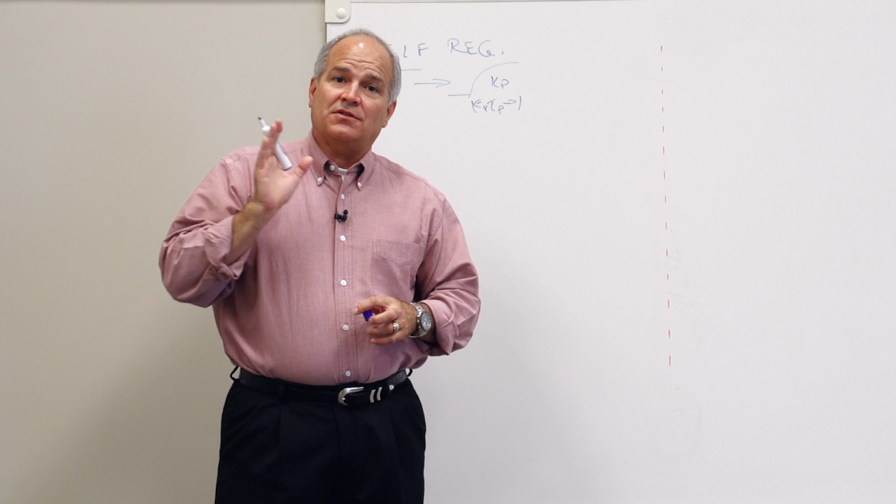There are two types of processes we've talked about before. There's what we refer to as self-regulating. Those are the kinds where you make a change and you get a process with a nice smooth response. From other videos we've done, we talk about the process gain and the time constant that define how much it goes and how long it goes. Those are self-regulating. Things like flows, pressures, temperatures, consistencies, those types of things.

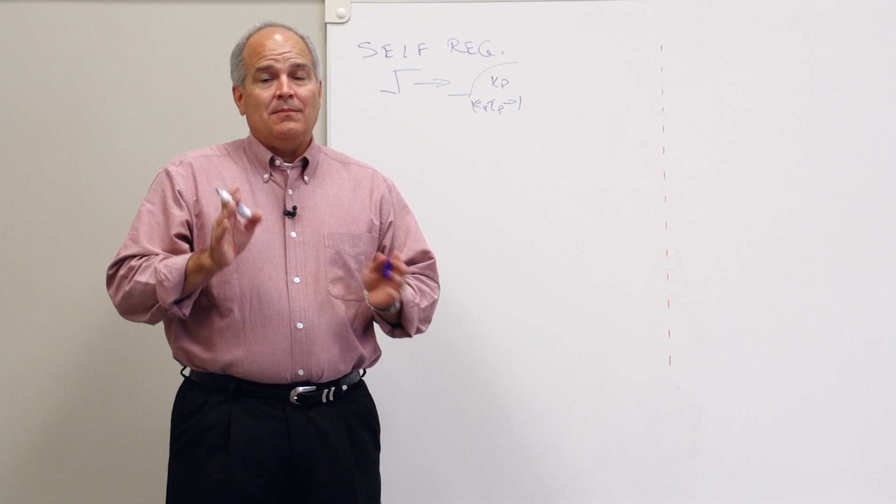That's not all your processes though. That's about 80 to 90%, which is why a lot of guys are good at that. But then we move into the non-self-regulating, or what we're going to refer to as a tank.

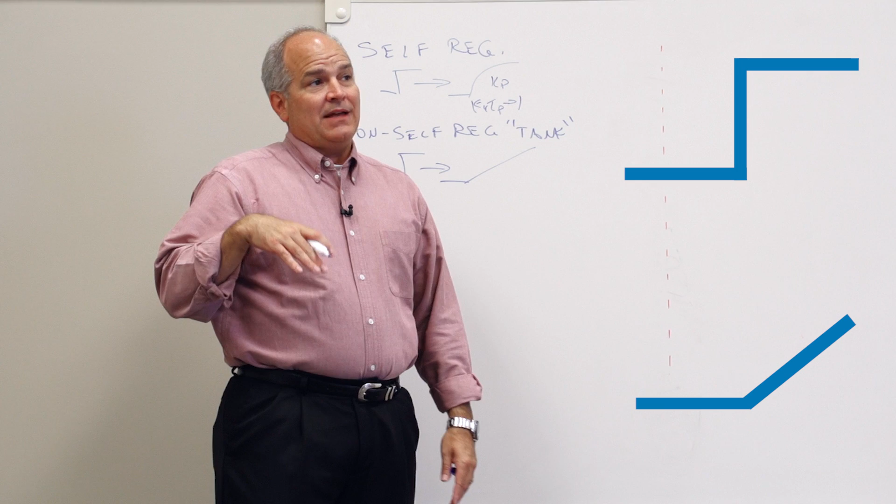In this case, whenever I inject an imbalance, off it goes. That's why they're a little bit scary. If you're doing a manual bump test, you have to pay attention. That's why we really recommend that you do a visual inspection—you walk around, you get an understanding of your process before you start doing a bump test.

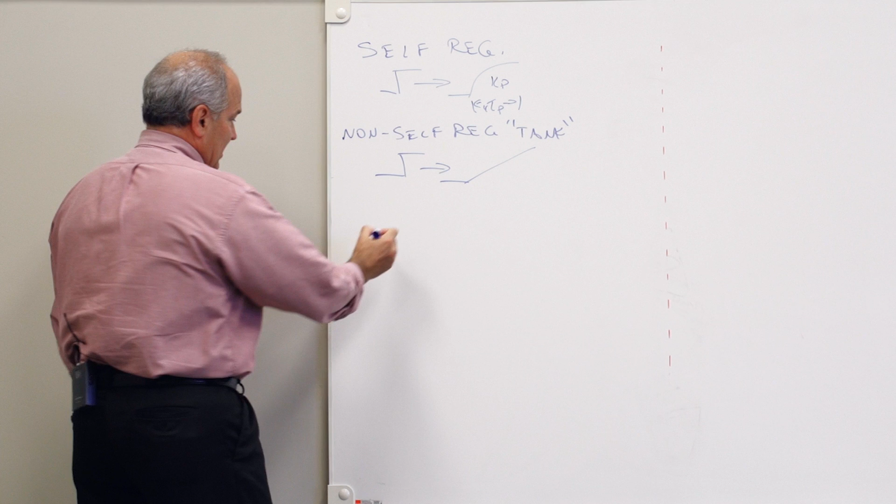So what we're going to do is talk about how do we identify the process, how do we come up with a model, and how do we come up with tuning rules to identify and make sure that this loop is properly tuned. Now for our process, I'll just draw a little picture here of a tank.

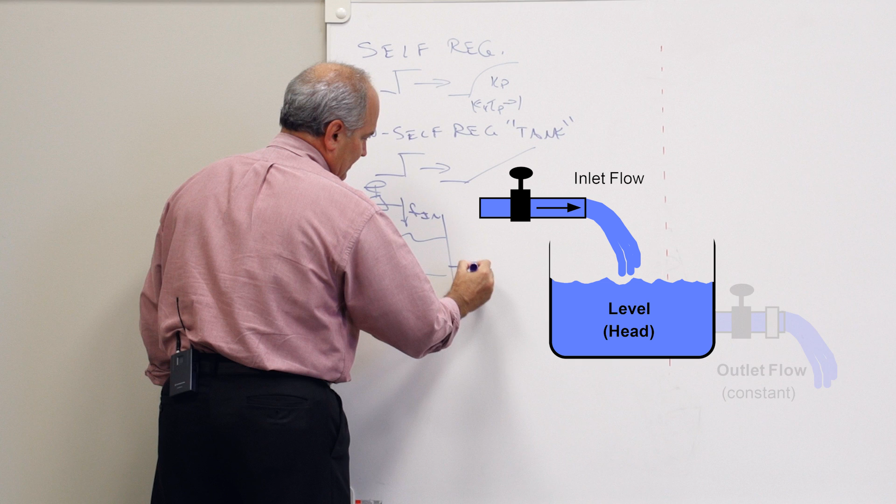It has an inlet flow, and here we've got an outlet flow. In this case, what we have is a controller that's usually fixed. So this is our flow out, and our flow in. This is a fixed outlet flow—maybe it's a drive, maybe it's a control, but it's a constant demand. In other words, what we've done is broken the link between the head pressure and the flow.

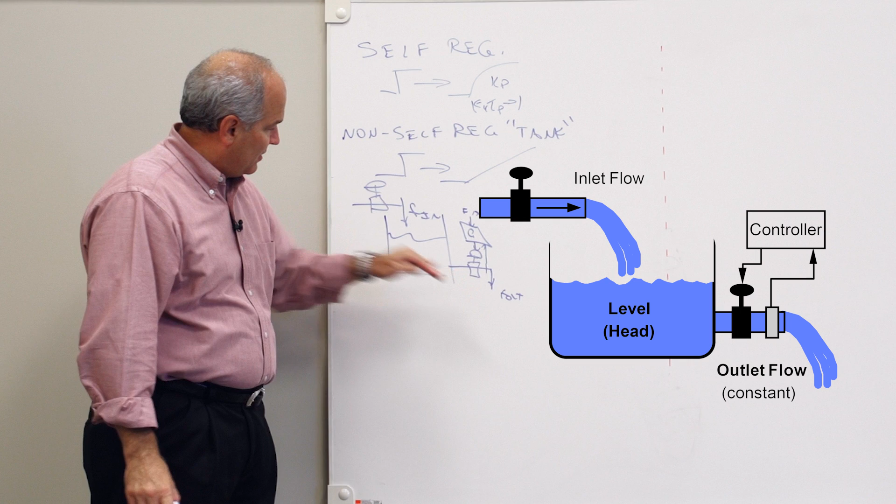So in this case, if we have a bump test, let's say our flow in equals our flow out. In this space, we would say this is balanced. And this would be our level. So when the flow in and flow out are the same, the level doesn't move.

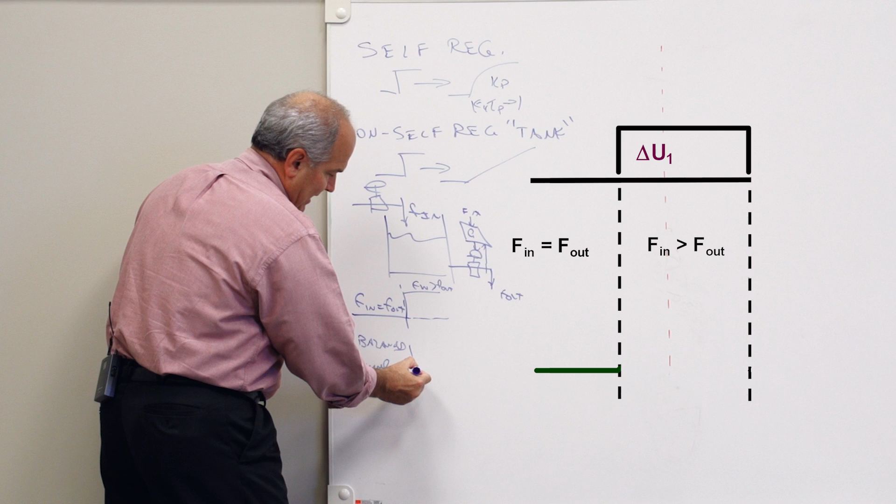Now what happens if I increase the inlet flow, so the flow in is greater than the flow out? Well, what's going to happen is your tank is going to start moving. Now let's say at this point we drop the inlet flow back, so once again the flow in is equal to the flow out—we're back into a balanced mode.

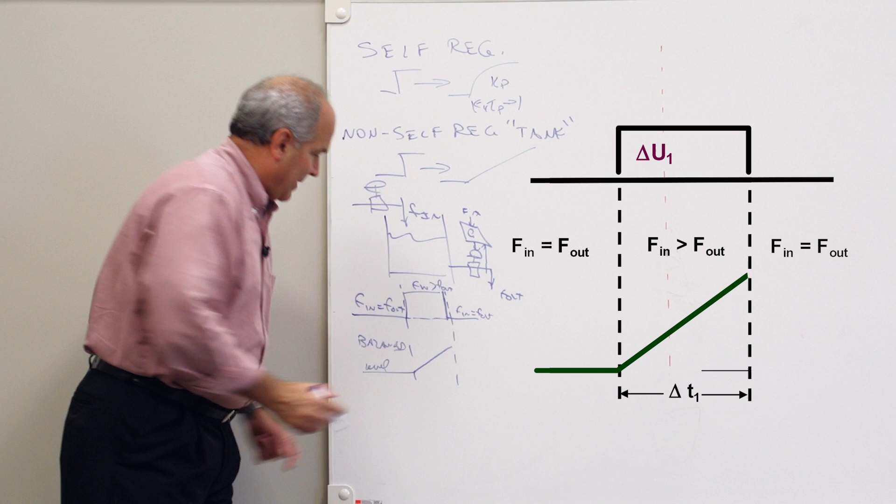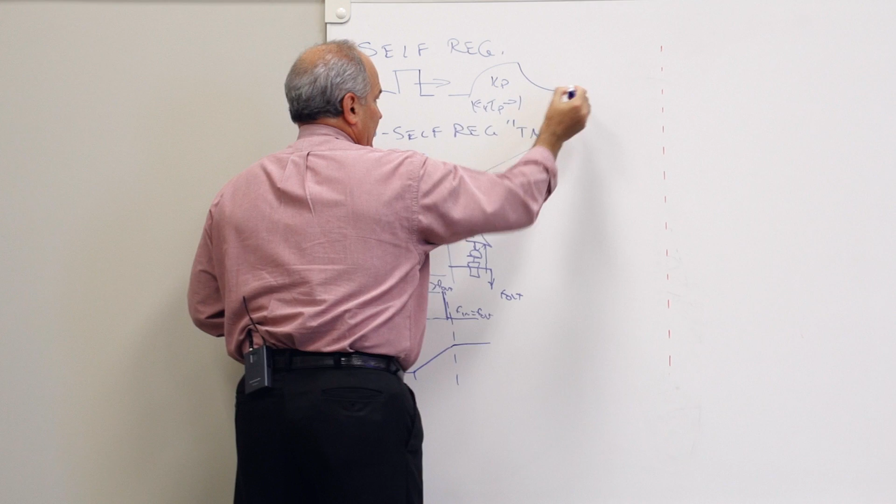What's going to happen to the tank level? It's going to stop. This is one of the ways I like to determine if I even have a self-regulating process. On a self-regulating process, if I put the actuator back to where it was, the process will come back down. If I draw the rest of this, it'll usually come back to where it started if we don't have stiction and hysteresis.

But in a tank, if you put it back into the balanced condition, your measurement will move based upon how long it was separated. This is why we call this an integral type of process—you can see it's integrating this difference or this imbalance. That's why these are tricky.

So what's the process model? How are you going to come up with model parameters? You can't use the process gain and time constant because it never stops, it never settles. So our definition of process gain as it applies to self-regulating would virtually be infinite here. So we have to have a different model.

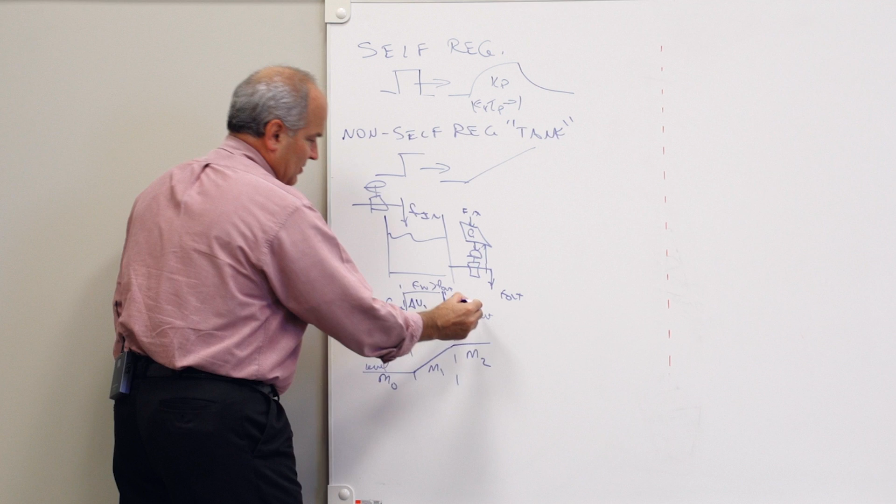What we do here is recognize that there are different slopes—let's call them M0, M1, and M2. And let's call this change in output 1 and change in output 2. In this case, what we're finding is that the process gain for a tank is equal to the change in slope over the change in the output. So the slope, how did this change versus that—that would be this process gain.

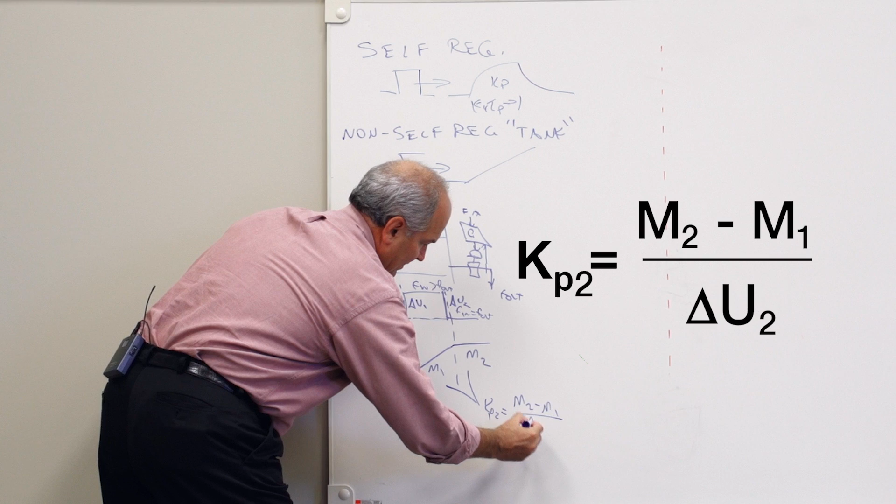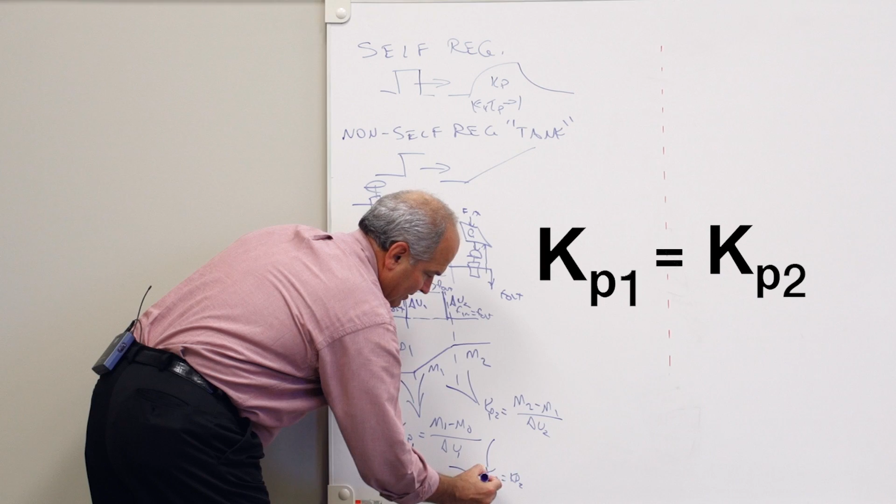Let's call that KP1. And then maybe we do it again for this one and say that KP2 is equal to M2 minus M1 over our output 2. I like to do these two process gains because I can also identify if KP1 equals KP2—then I have what I would call a linear tank.

Tanks can come in all shapes and sizes. You've seen them that look like a cylinder. Sometimes they're on the side so that they have a cross section that changes with the level. Sometimes they look like a cone. We're going to get into that in our nonlinearity section in a later segment, but right now we're assuming that we have linearity in our process gain.

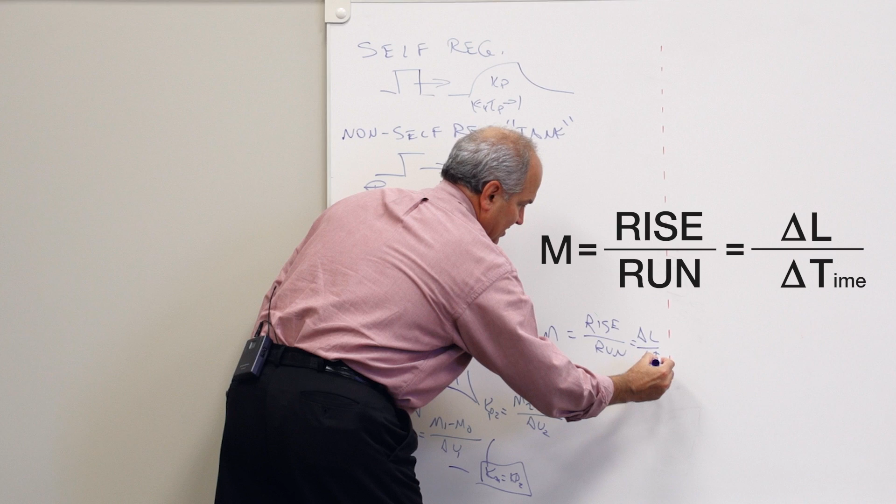But what I want to identify here is the slope change. If you remember, slope is equal to rise over run, which would basically be the change in level over the change in time. Now this is where, that's the slope.

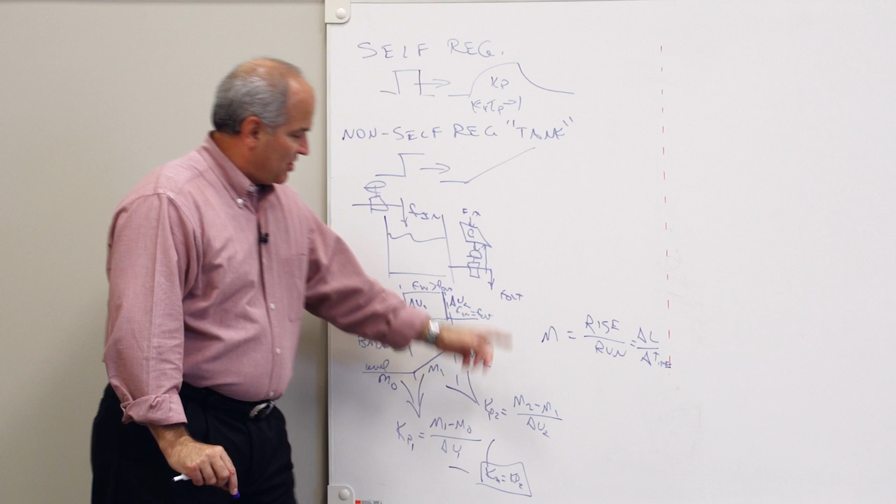This is where, when we do this in classes and in settings, it's kind of hard to do, especially if you have noise on your signal. It's kind of hard to identify. So I recommend that you do this a couple of times, but there's a few things I want to point out here: it's the change in slope, not the slope. I've seen this messed up.

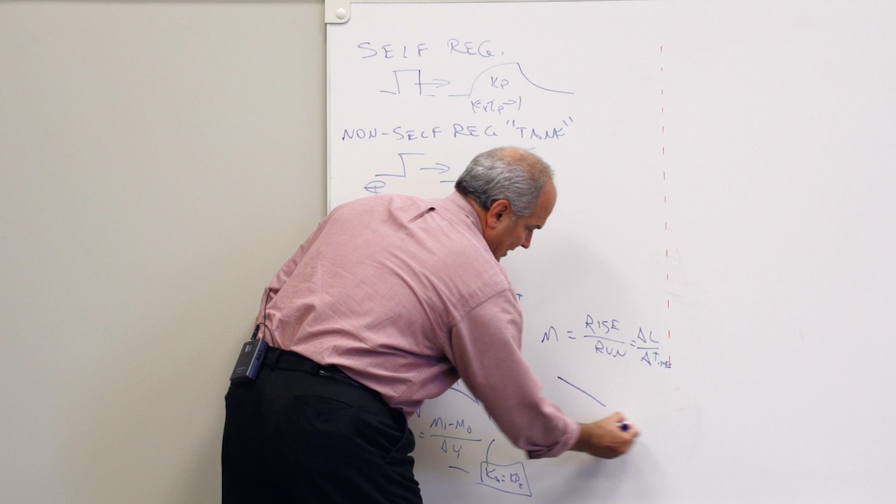For example, let's say that when I walk up to my tank, it's doing this, and then I do my bump test. Let's just say this is M0, this is M1, and this is my change in output 1. I can't just say the slope is equal to that divided by that — it won't give you the right answer. You have to get the change in slope divided by the output that produced it.

Now a couple things to remember here: your level. Most of the tank levels are normalized 0 to 100, but there are a few that are in feet or meters, so you then have to normalize that. I'd recommend that you look at your industrial books, your technical notes, to determine if the gain needs to be normalized or if they have a factor to do that already.

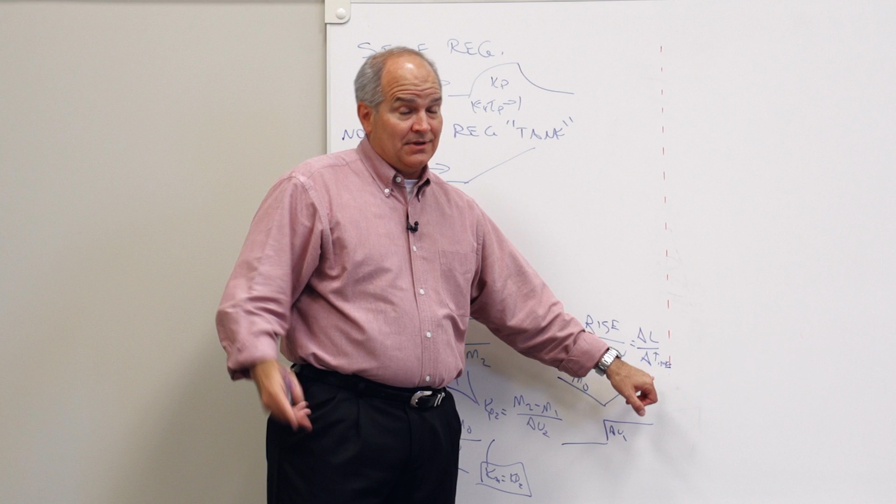But the time also has units — it can be seconds, minutes, or hours. What I would recommend — well, it's not just a recommendation — you need to set the time units on your slope equal to the integral time of your controller. So if your controller is working in minutes, you need to do your slope in minutes. If it's in seconds, it needs to work in seconds.

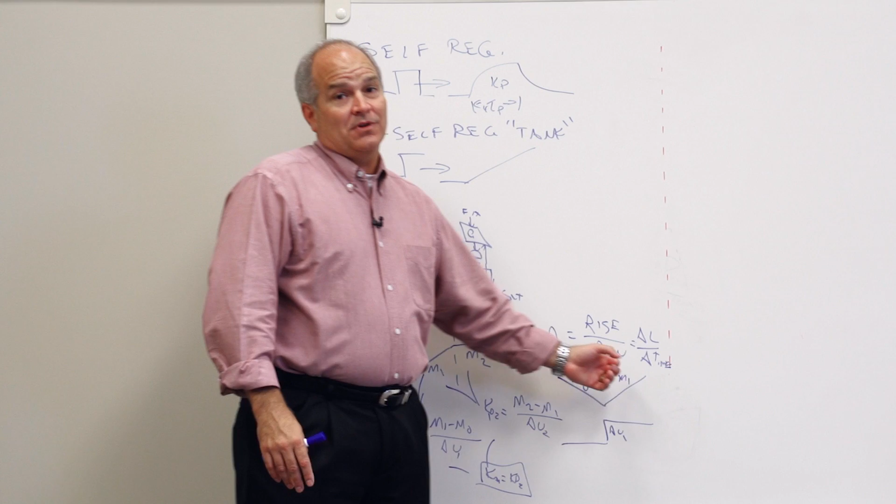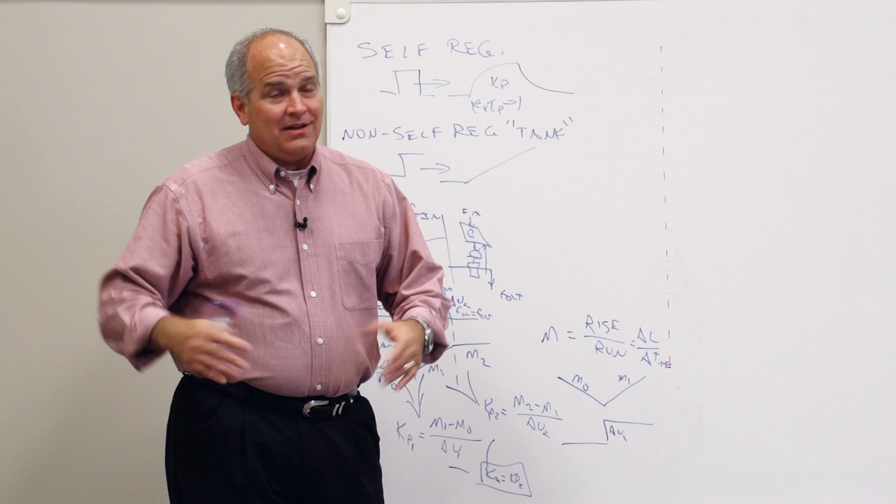I was teaching a class once and a guy came flying in to say, you told us wrong. He had calculated all this, but he'd messed up on his minutes and seconds, so he was off by a factor of 60 on his tuning and the thing went crazy. So this theory doesn't work — no, that's something I want you to understand: the theory always works, but your implementation of it might be an issue.

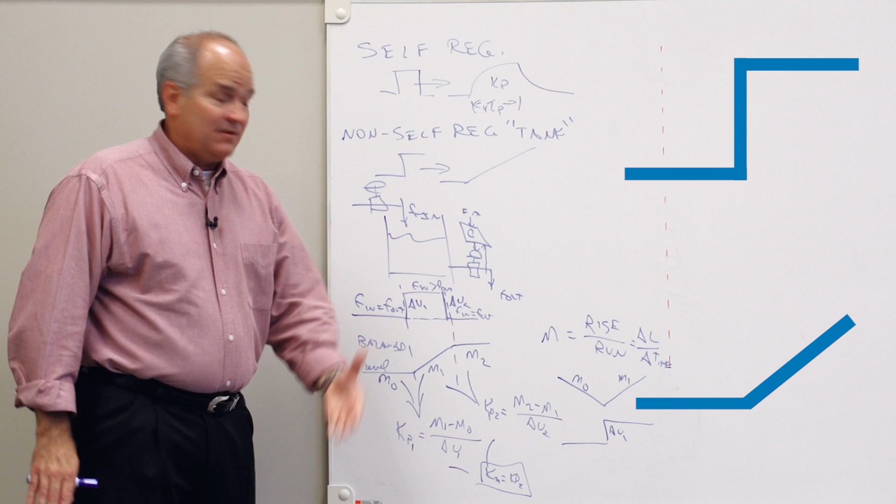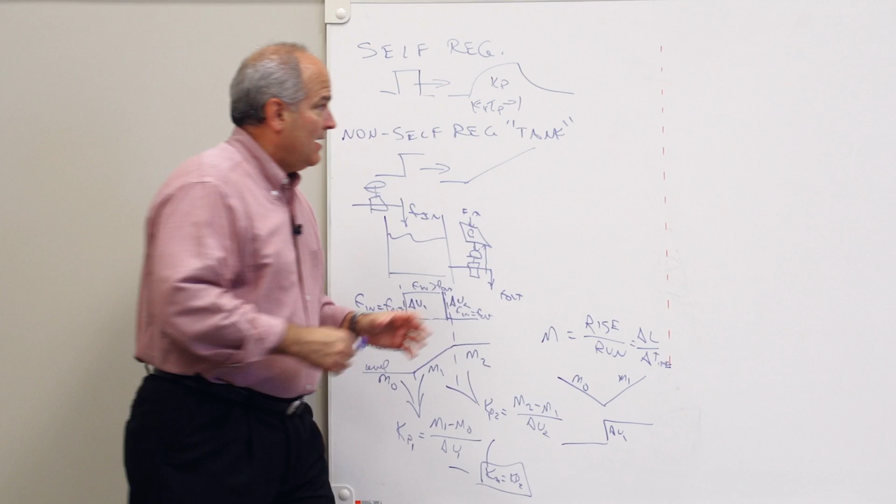So what we have here is we're identifying our process. We recognize that a large percentage of our industrial sites are self-regulating. Now we're talking about tank level tuning, or non-self-regulating, where we have an imbalance — we have an integration effect. So we have a new term, balance, but we have to calculate the process gain. I always recommend that you link the process gain back to the physical characteristics of the tank. What's interesting here is the process gain — let me just start here with, let's draw a picture.

Let's say this is my level, 0, and let's say this is 100%. So this is my measured value, and this is time, okay? And let's say this is another one here — let's say this is my flow in. So here we've got, this is time, 0 to 100.

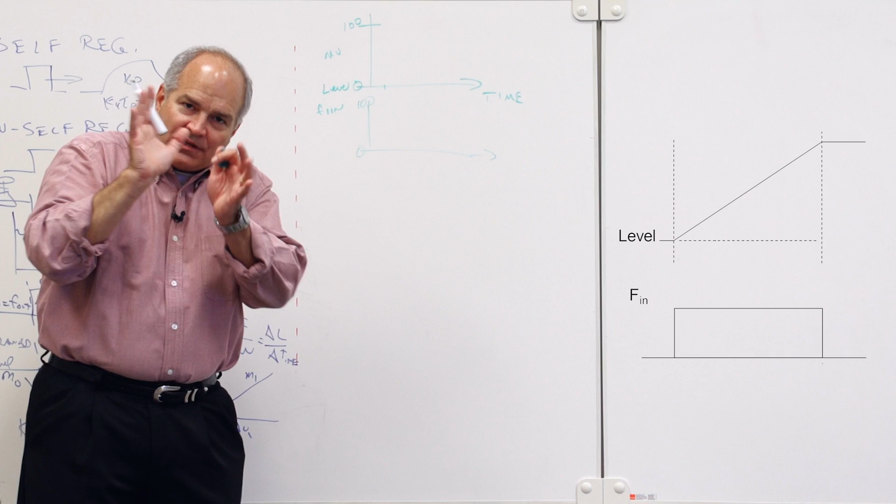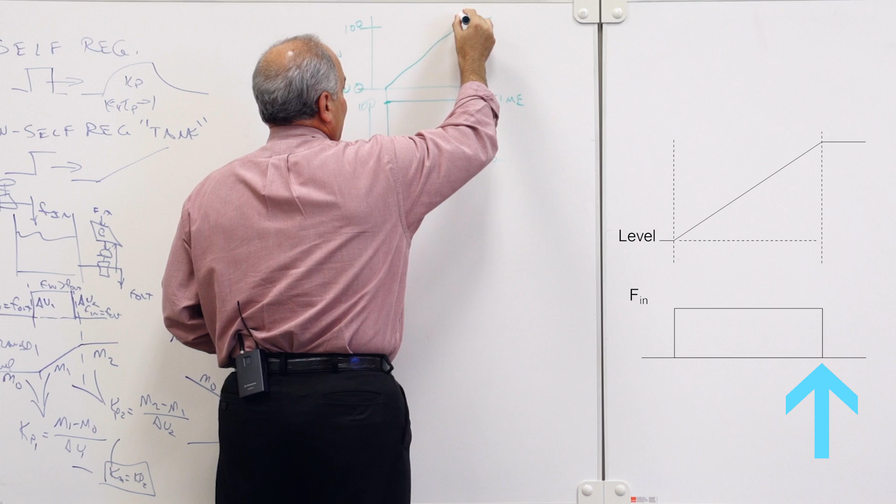So what we're trying to do here, to help you understand what this process gain is calculating, is: if my flow is 0, I have nothing going into the tank. Now what we do is we take our flow to 100%, so we have 100% of our flow being pumped into our tank. It was empty to start with, and we've shut the outlet valve off, so we have an imbalance of 100% — it's the biggest we can get. So what's going to happen to this level? Let's say we time it so that we drop this back to 0. So what we're doing is we are filling the tank.

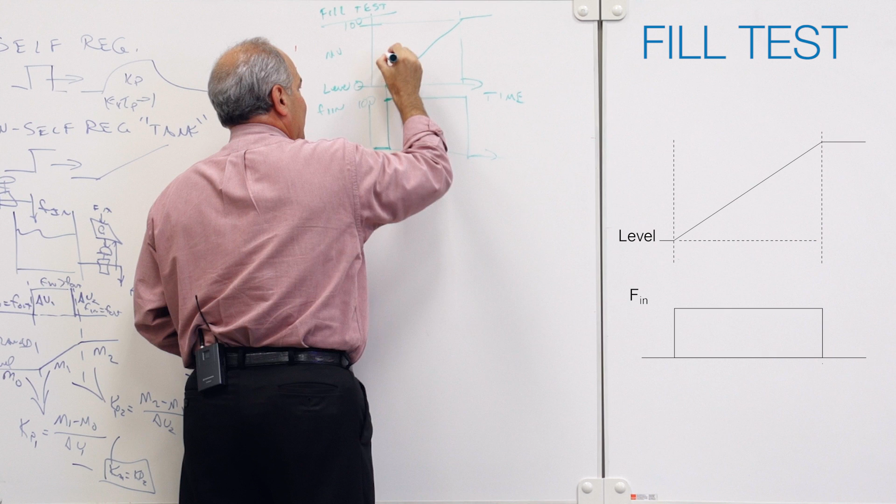So we have filled the tank. Let's call this a fill test. This time from here to here is what we call the fill time, the tank fill time. Now I don't recommend that you go and do this, saying, 'Mr. Operator, could you shut all your tanks off so I can fill them up and time it?' If you could, great, but you can't do that. So what we're trying to say is the fill time is really what we're looking at.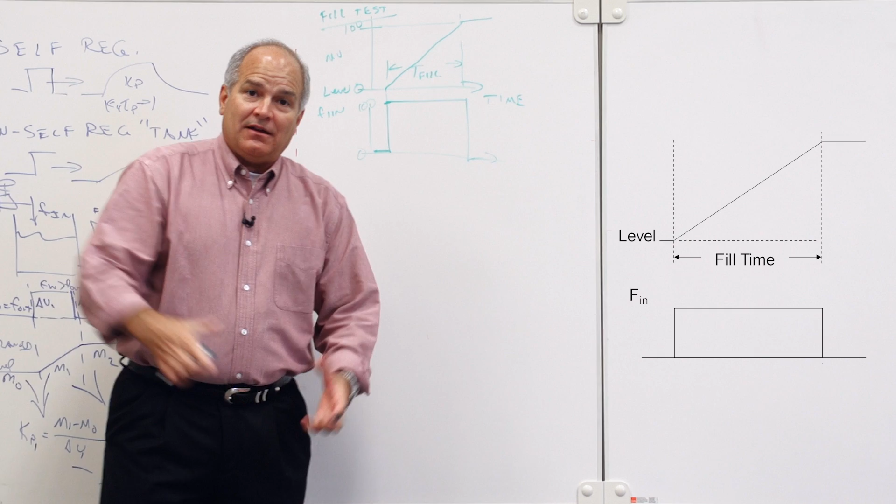Imagine a garden hose that you're filling a bucket with. It's going to take a while, but now let's say you got this gigantic hose. How long does it take to fill that bucket? It's a function of the amount of volume of fluid going into it.

So the way I like to think of the process gain is it tells me the relationship between my input device and my tank size. If I have a tank as big as this room and I've got a little garden hose, this is going to take forever to fill up. But if I have a tank that's the size of a glass, it'll fill up really quick. So that's why one guy used to say the amount of time it takes to walk around a tank is real close to the fill time.

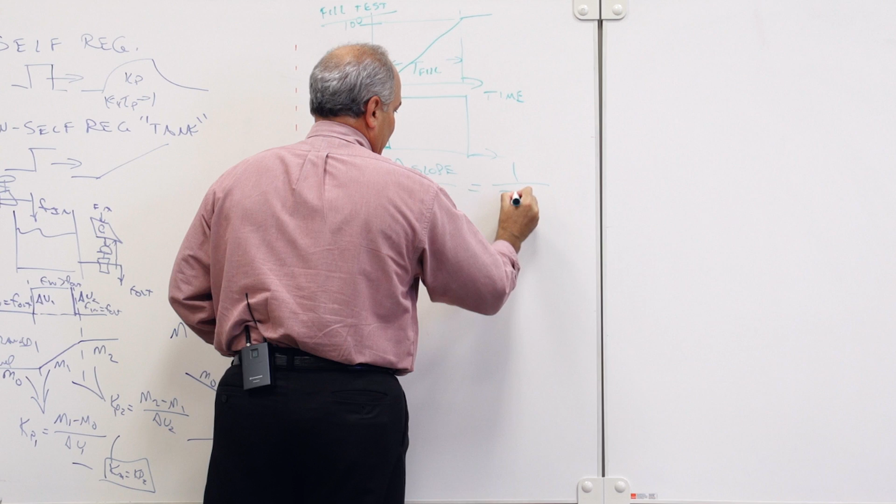Now again, I don't necessarily recommend that you go walk around your tank, but this concept that the fill time is what we're after - it turns out that the process gain, which is the change in slope over the change in the output, is equal to 1 over the fill time. So the process gain and the fill time are related, they're inverse of each other. Which is where we started thinking, maybe we don't even need to do a bump test.

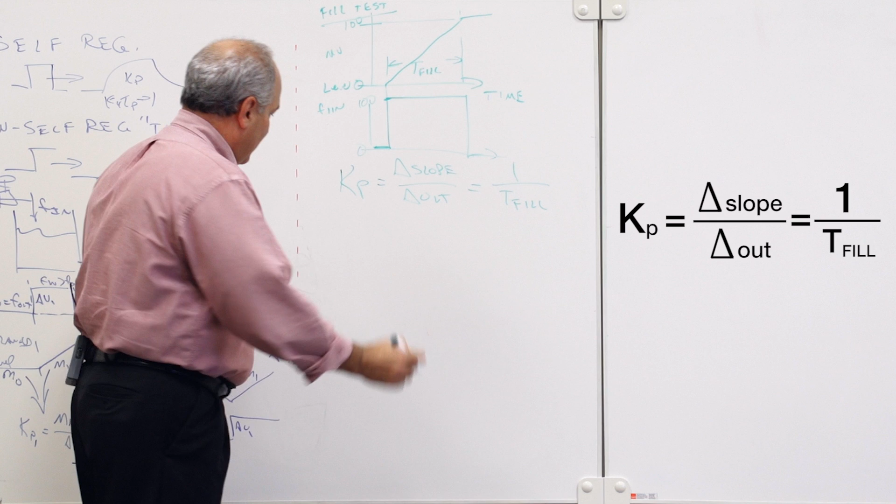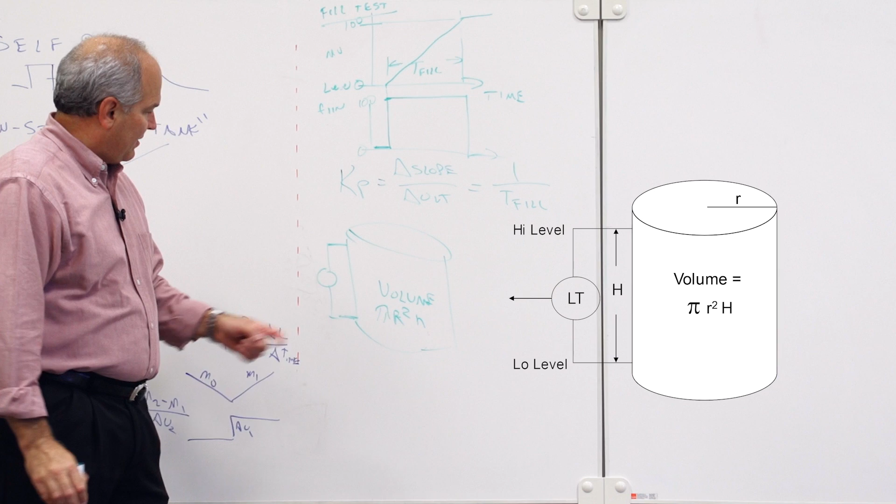What if we have our tank here, if I know the volume, which is pi r squared times the height. And here's my level transmitter, and you got your taps. So the height's the distance between the taps. And then we have our inlet flow, and we know that, and we can identify the maximum flow.

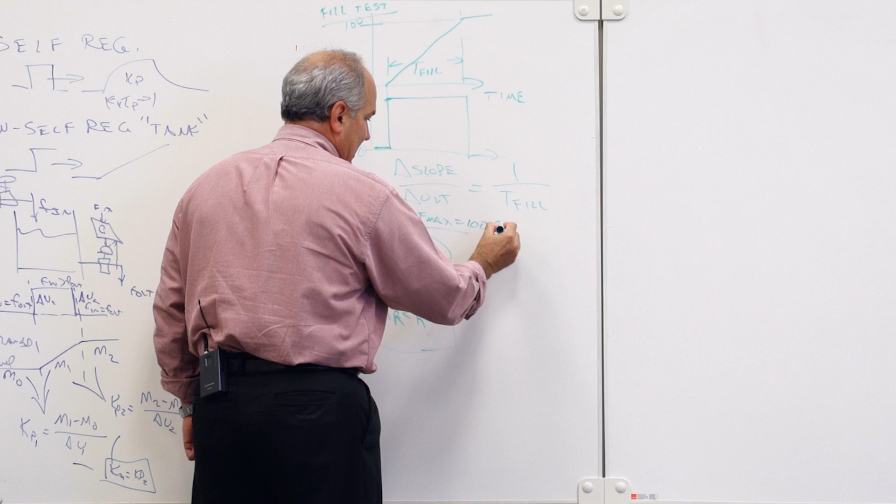So if I know the maximum flow and the volume of the tank, I can calculate how long it takes to fill that. For example, if this max flow is equal to 100 gallons per minute, and let's say this volume is equal to 1,000 gallons, how many minutes is it going to take to fill it? 10 minutes. So this would have a process gain of 0.1.

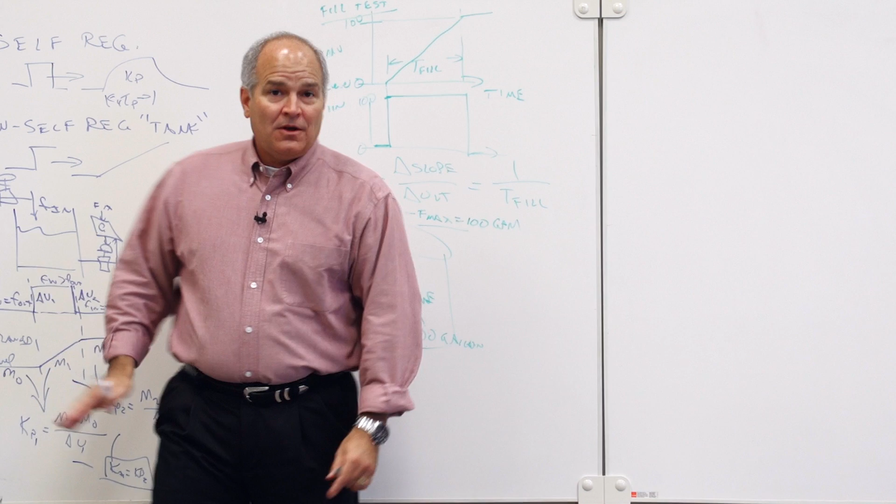So that's how we do this. I always recommend that after you calculate your process gain, whether you use the slope technique or the volume technique to calculate the fill time, go and take a look at the tank and see if that makes sense. I've run into a lot of cases where they messed up the fill time, or messed up the max. They looked at the span on the transmitter and had it calibrated wrong.

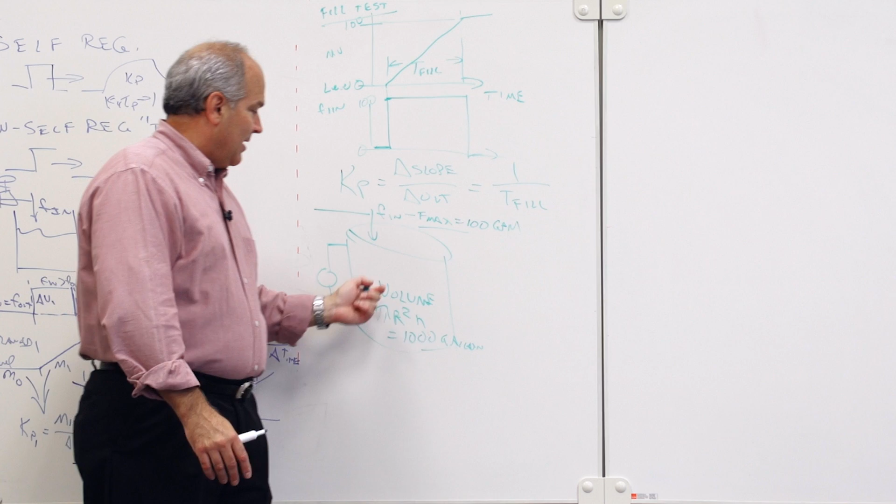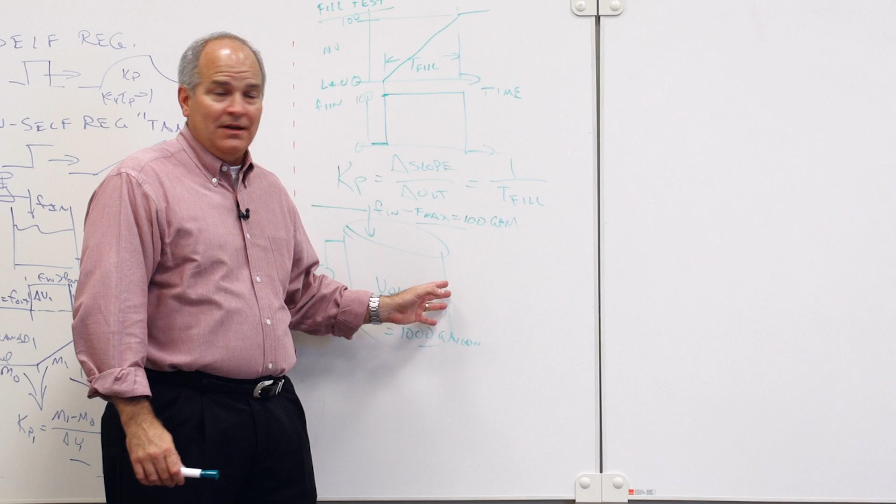A lot of times this volume, you can go look at the tank, look at the diameter, and calculate it. But on a lot of industrial P&ID drawings, they'll have the volume stamped right there on the drawing. So I've come up with my process gain, and then I apply that directly into my tuning, and it's incredible how fast you can tune a loop. So if you don't have this information, then you have to do a bump test. If you have this information, I find this to be way more accurate, because the fill time is what you're after.

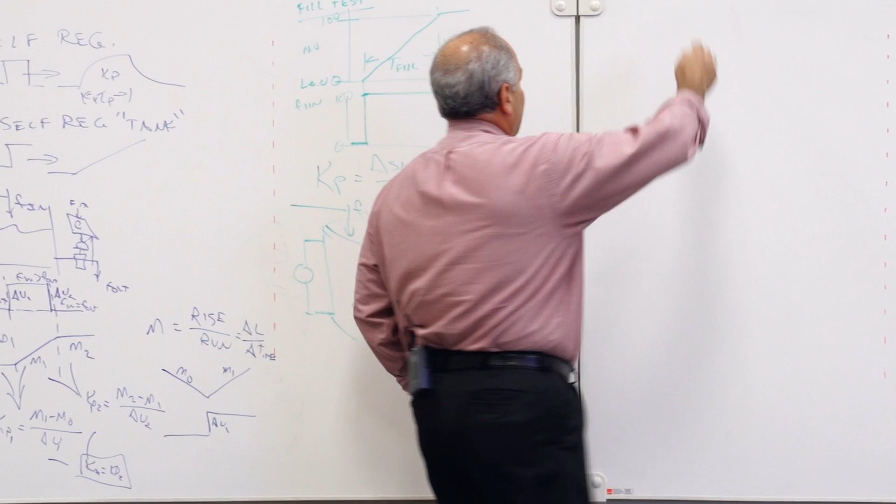Okay, now that we have the process gain, what we're interested in is coming up with the tuning. So now that we've identified the process, now we need to come up with tuning.

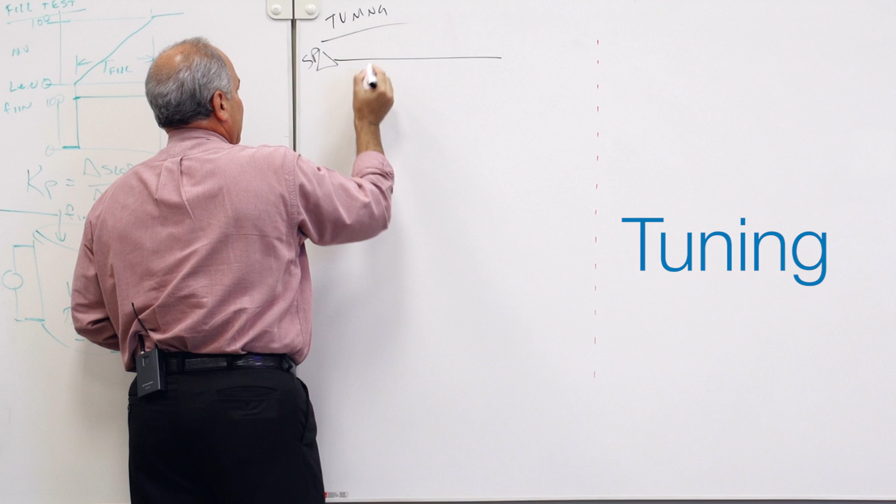Now, what we're trying to do with this technique is, if this is my set point right here, and here's my tank, there's been a load change, a disturbance of some sort. Let's just say we had a disturbance, so this was a load change. What's going to happen? We're running along, someone opened the outlet flow. What's going to happen to the level? The level is going to come down, and what we're going to want to do - so this is the flow out - we're going to want the flow in to quickly come up to this point.

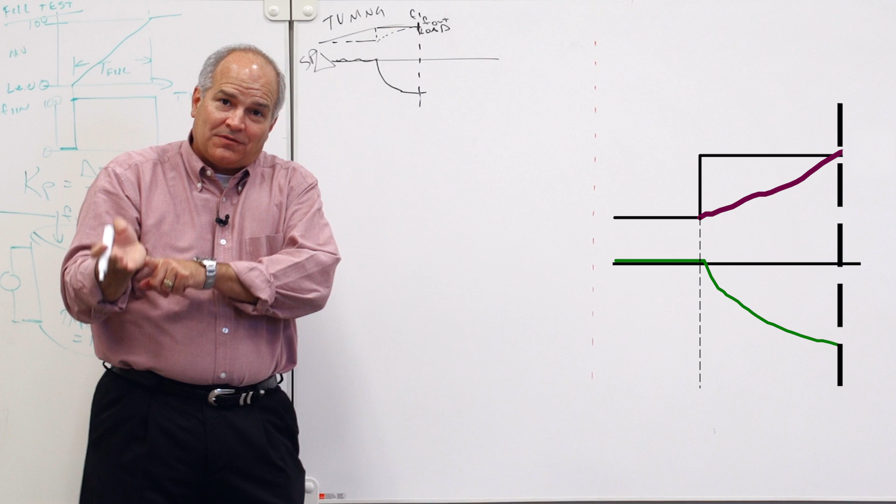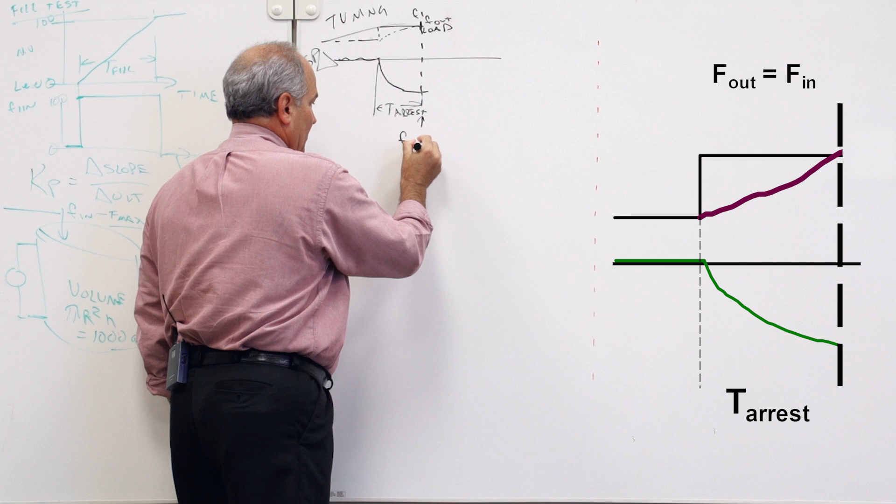What happens when the flow in is equal to the flow out? The tank stops moving. So what we do is we define this as the arrest rate. There's a couple neat things about that. That's where the flow in, at this point right here, is equal to the flow out. In other words, we've balanced it.

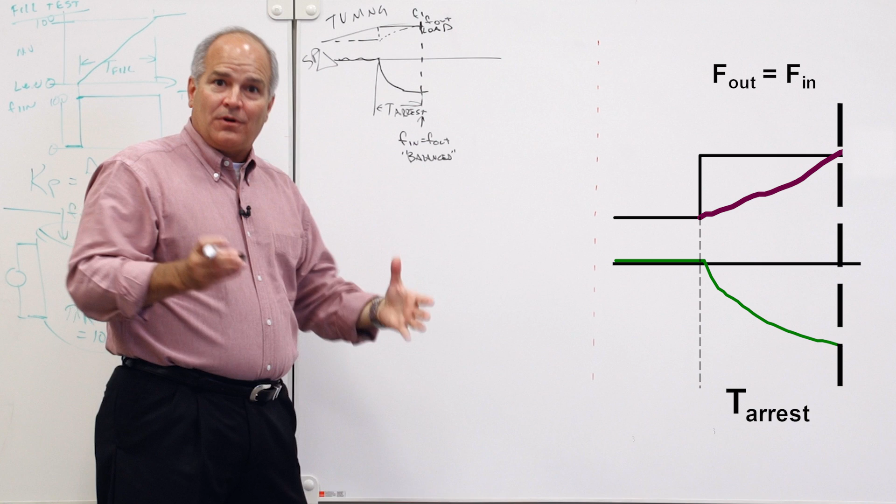However, if we stop there, we result in an offset. So control has to keep working. It has to have the inlet flow go above the outlet flow for a period of time to bring this thing back around.

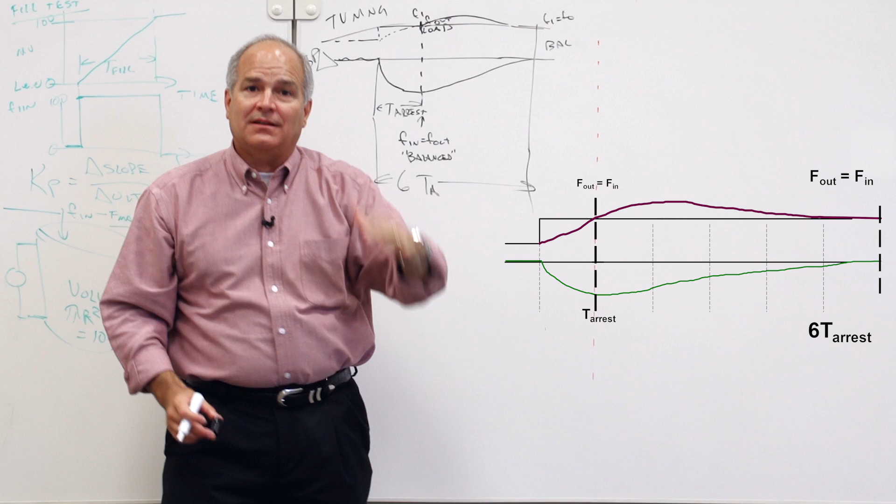And what's interesting, again, we're over here, we're balanced again, where the flow in equals the flow out, we're balanced. It takes 6 arrest rates. This is what we call a second order critically damped tuning for a tank. It's the fastest you can go recover from a disturbance without oscillating. This is the goal, this is what we're shooting for.

For you guys that like root locus, I'll real quickly show you what we're doing here. Because we have a double integrator with our tank, we got our PID control, our proportional integral, and our tank is an integral. So we have a double integral.

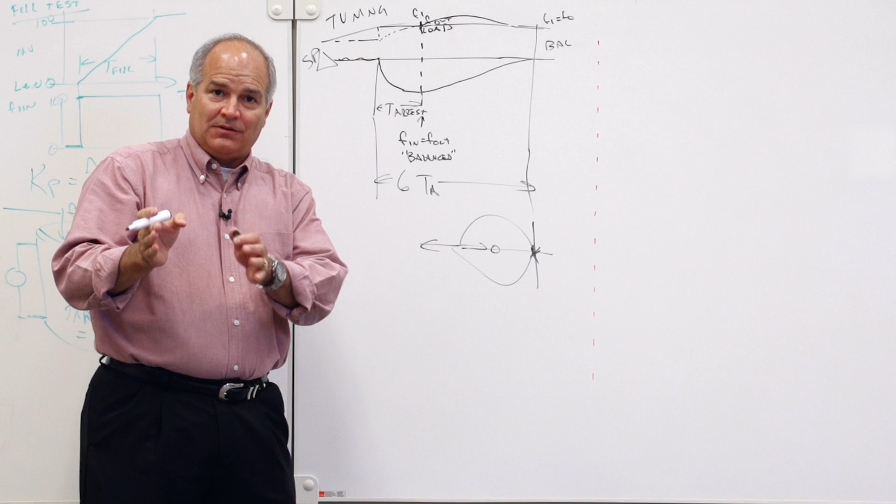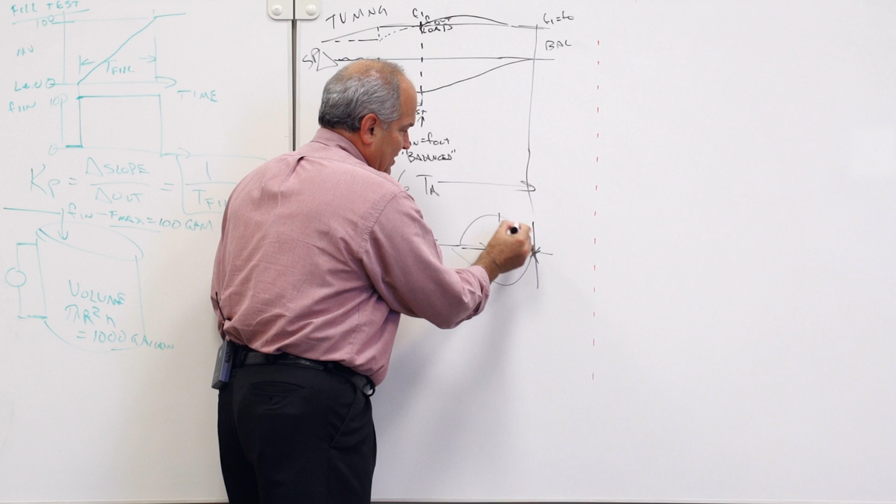We got 2 poles. So what happens is, as you start increasing your gain, this is where most people mess up, this is the region a lot of people will leave their control tuning, which means your tendency to oscillate. Now, I don't mean to worry you if you don't understand root locus, that's okay. This plot just shows what happens to the tendency to oscillate as I increase the control gain.

So what happens is I start increasing the gain, I start to oscillate. What do we all do? When we're in an oscillation, you cut back on the gain. Well, you cut back on the gain, you just change the amplitude. If you increase the gain, it gets better. Nobody, by tuning by feel, says, oh, if it's oscillating here, let's just increase the gain a little bit further.

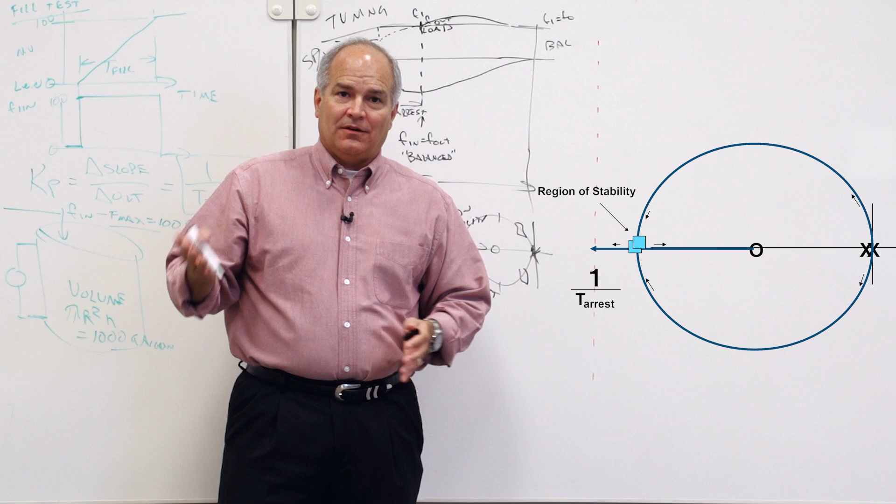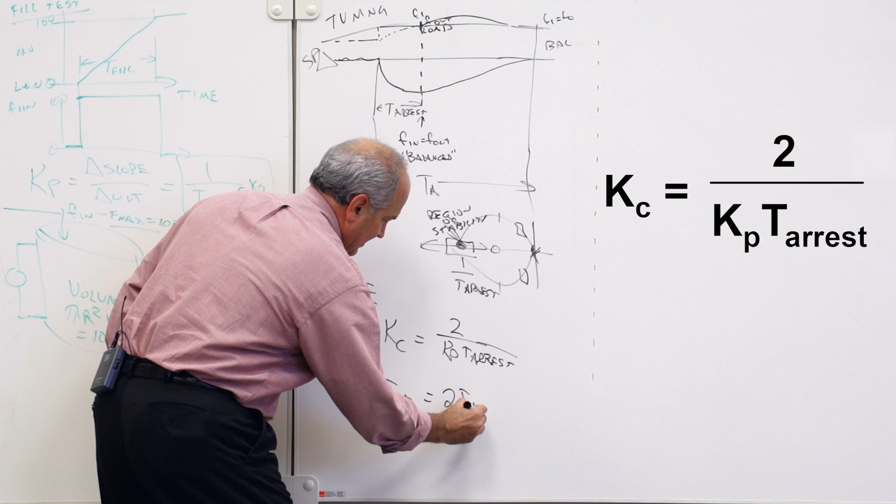Okay, so what are we doing here? How do we calculate all this? When you plug all this math in to come up with the tuning rule, it's actually pretty easy. We say that the controller gain is equal to 2 over the process gain times the arrest rate, and that the integral time is equal to 2 times the arrest rate. This is the tuning rule for a PI standard algorithm, not parallel or classical, as we've talked about.

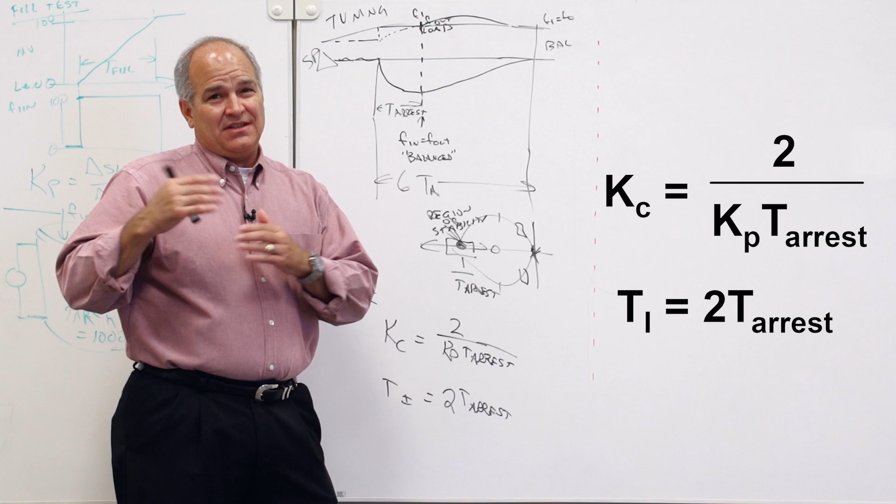I also want to make sure that if your level is normalized 0 to 100, you're good to go. If it's in feet or meters, then you may have to scale it. So please look at your technical documentation, but your 2 over K-P times arrest rate, or 2 times the arrest rate, is your integral time.

This tuning technique will result in this type of response. It's so important that you go back and validate your tuning once you've done it. Cause a load change, watch it stop, and then watch it recover. It's pretty neat to see, and it almost looks like magic when you can tell a customer, hey, it's going to take 6 of these arrest rates to return.

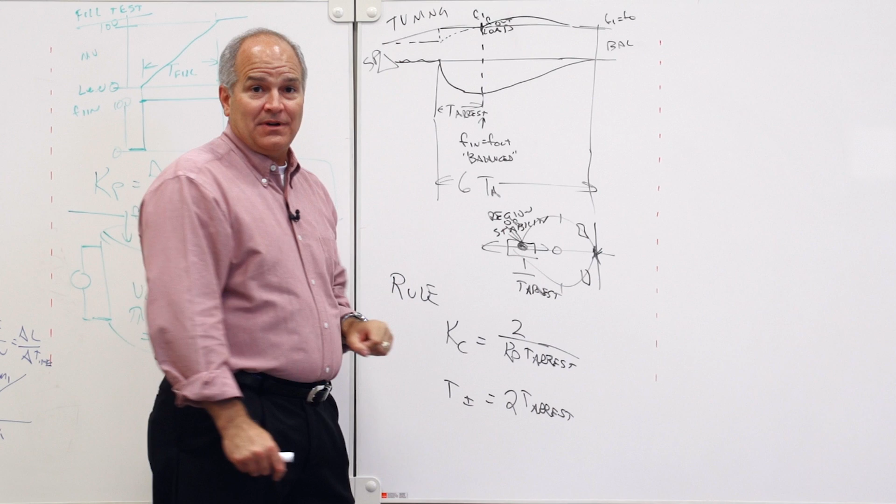Now, for some of you guys that are really interested, how far does this fall? Well, if I know my load change, this change in error, the max deviation, will equal the change in load times... let's see, it's got it. So it's going to equal K-P times T-I over 2, times this E value.

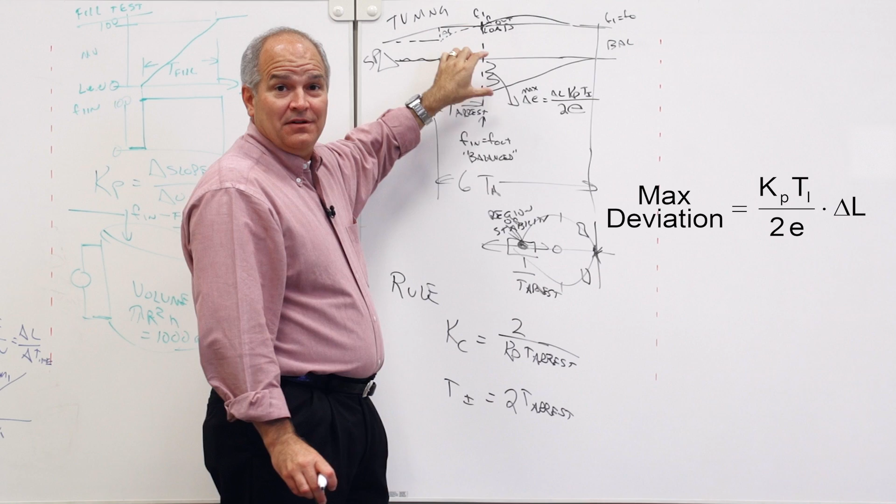So I know it's kind of tough to see, but it's whatever your integral time is, times your process gain, and then your load change. So if you know that you had a 10% load change, you can calculate how far this is going to go. So I've actually come up with tuning like that. If I'm working with a system, I say I can only allow this many inches of movement.

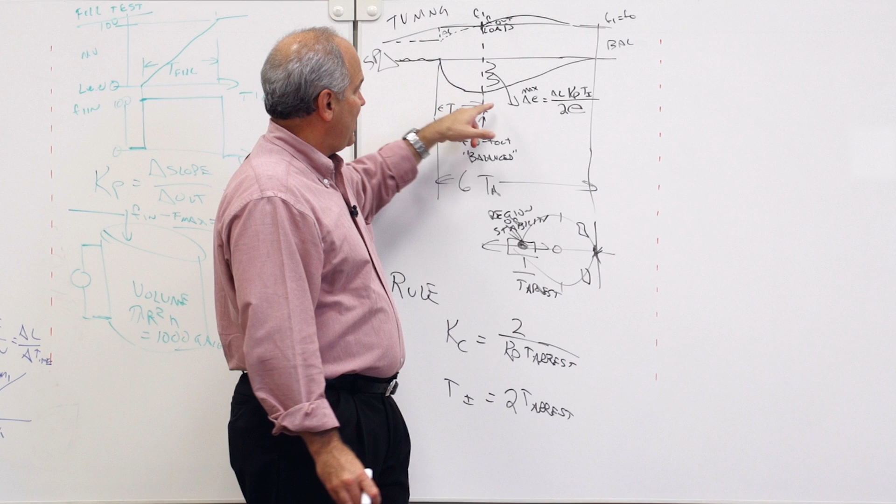Then I say, well, how big of a load change do I have? Once I know the load change, I can calculate my process gain and my integral time that I need to give me those results. So this is another neat little equation that you can use once you use this technique.

Now, this is great, but what people have asked is, how do I calculate an arrest time? And I'm like, well, that's a good question. So how do we calculate an arrest time?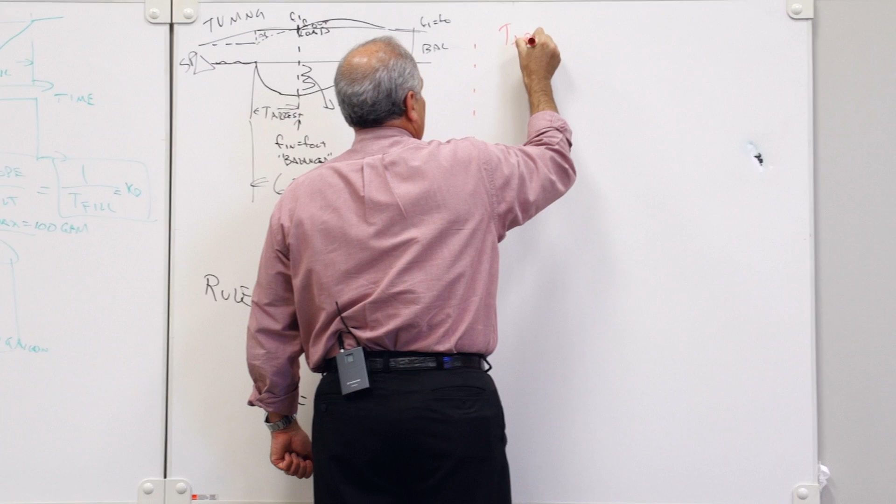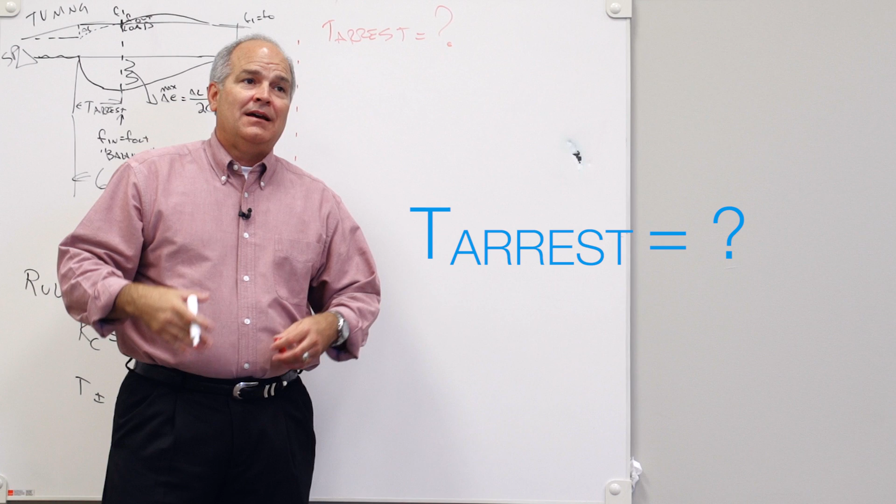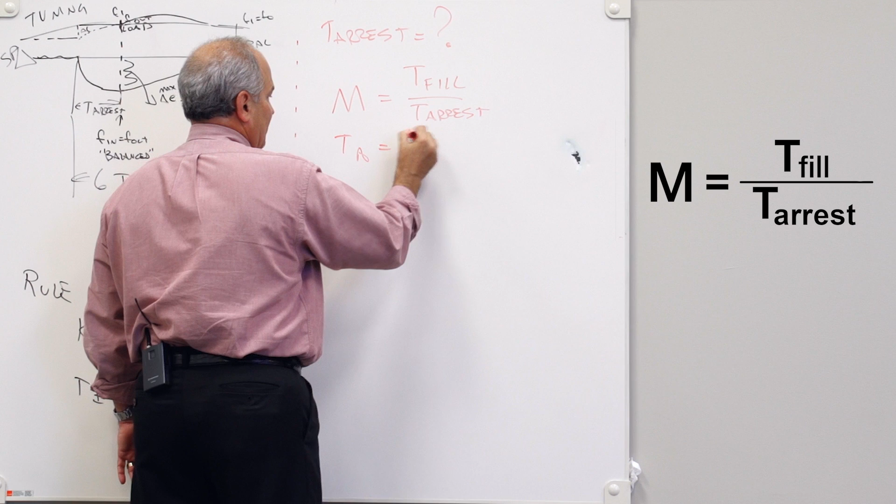When we did our self-regulating, we came up with a tau ratio to try to bias our tuning so that it was a function of our process. What we've come up with is if we say that we come up with a new variable m, say that whatever our fill time is divided by our arrest rate. In other words, we can flip this around and say that our arrest rate is equal to the fill time divided by m. So for example, let's say if m is 1.

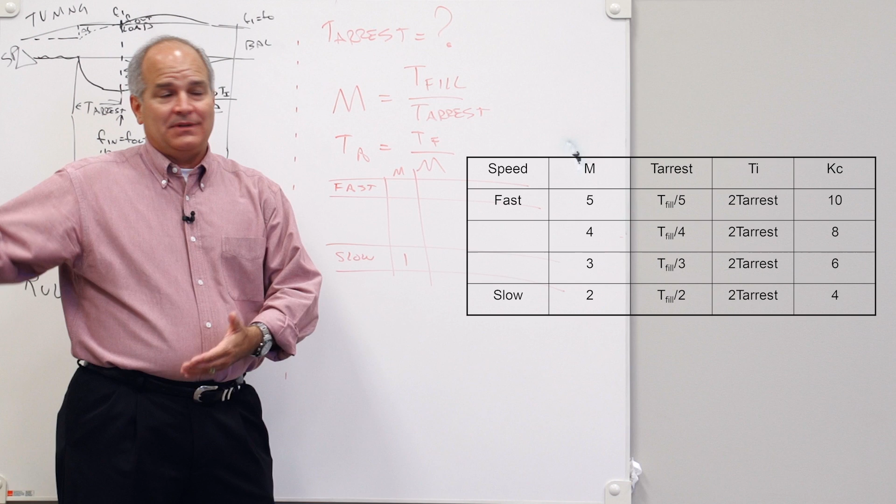Well, that would be fast or slow. Let me make a little table here, because everybody wants to know fast and slow for tanks. Let's put this m thing here. So if I say m is 1, that is really slow, because that's saying that the fill time is equal to the arrest time. That means it's going to empty before you even start to try to recover. That's one of the things I do when I'm analyzing tanks, is I look at this relationship and I know that they've tuned them so slow that any disturbance I have, it's going to empty or overflow before we even come back.

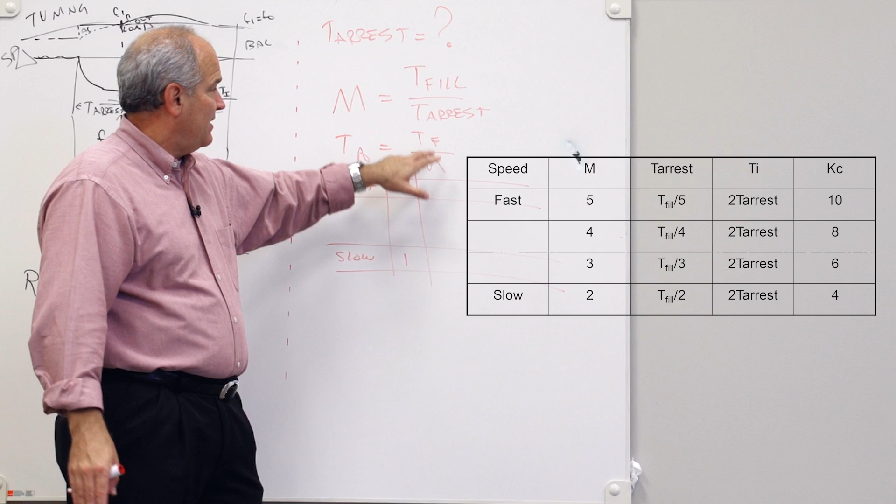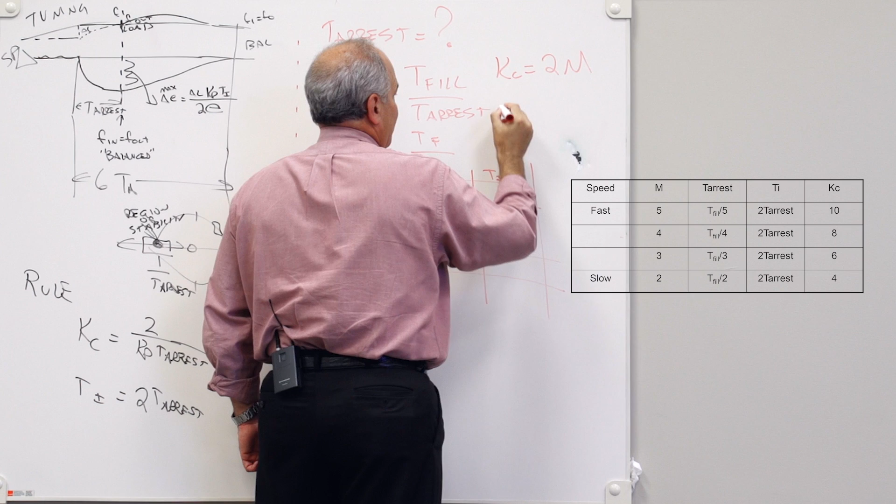Maybe I like picking a 5 to 10. So what we do is we say that our arrest time is 5 to 10 times smaller than our fill time. When we do that, then when we plug this in, you can say that let me put our controller gain here and our integral time here. It's pretty neat. If you take our tuning rules that we had over here for arrest rate, your Kc is just equal to, well let me just do that here. This results into 2 times m, and Ti equals, it's 2 T arrest, so you can put in, it's 2 fill time divided by m.

So now what I like about this is if you notice that that's one of the things with tank levels, you just can't set the integral and move the P for control speed. What happens is this circle literally changes size based upon the type of tuning that you want. So what we have here is this m, this speed is in both components.

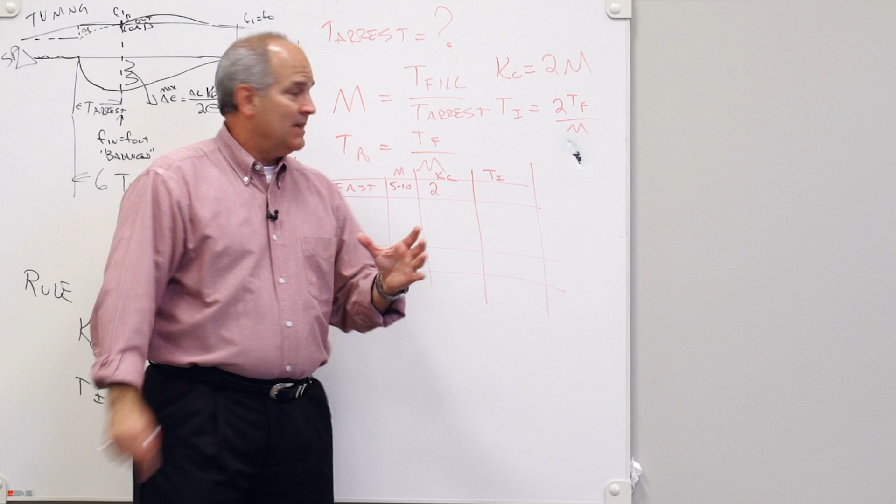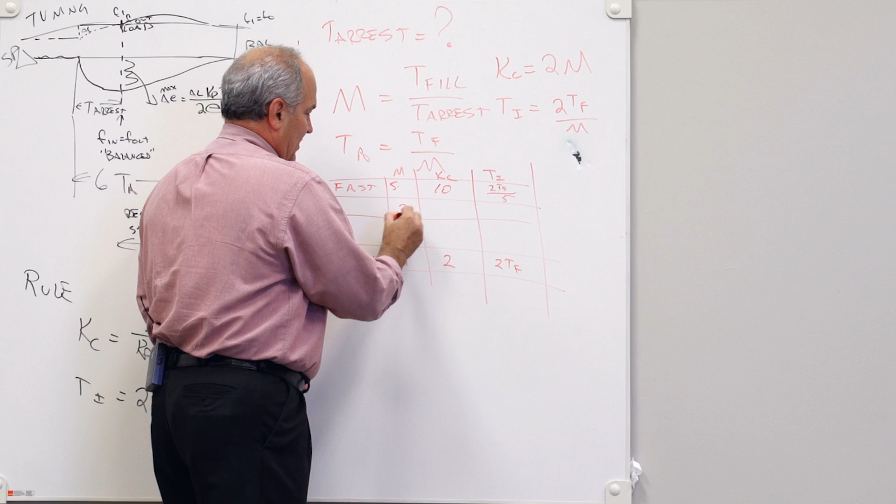So if we pick, let's just say 5, what that would do is it would give me a gain of 10, and then our integral time would just be 2 times the fill time over 5. And then if we go down to 1, you would just say this would be 2, and then it would be 2 times the fill time. And then what I do is I usually will build a couple of these, maybe go with 3 and 2, and then I'll fill in my table. And then I come up with the speed of response that is desirable, that gives me the best deviation and the fastest recovery time without overshoot.

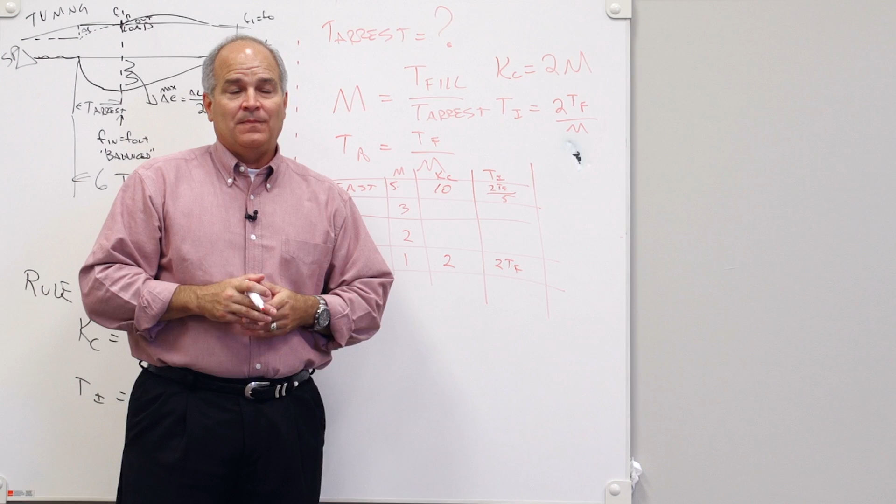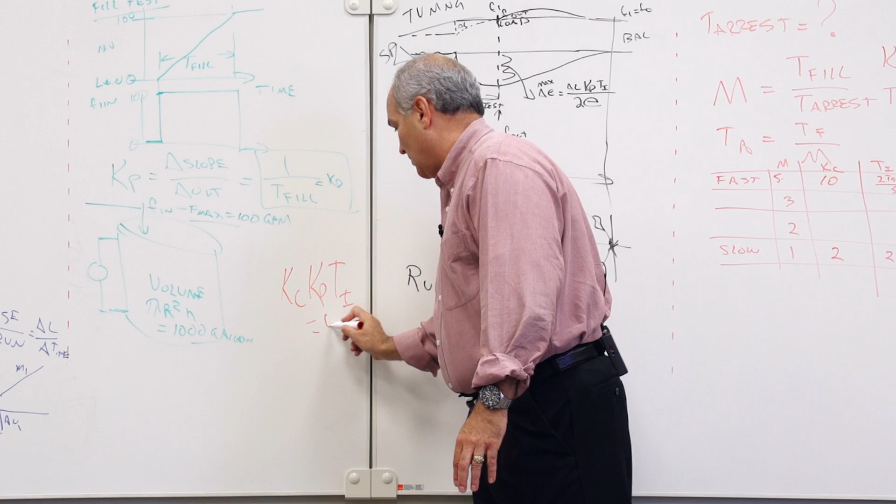What we found is this process can actually go pretty fast. If you can calculate the volume of the tank and get the maximum flow, you can calculate the process gain pretty quick. And then what I like to do is just to kind of get a feel, is if I take my controller gain times my process gain times my integral time, when you use these tuning techniques, this should equal 4. If it's on either side of 4, it's either going to take forever to get to the set point, or it's going to oscillate around the set point.

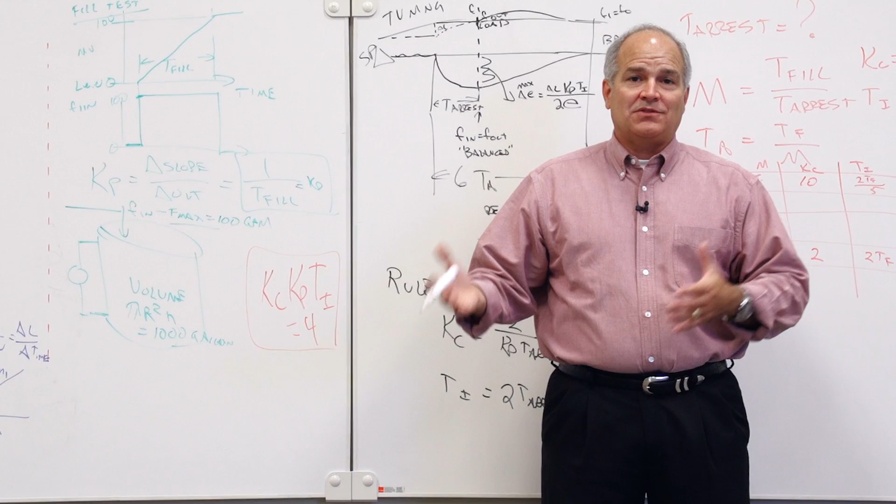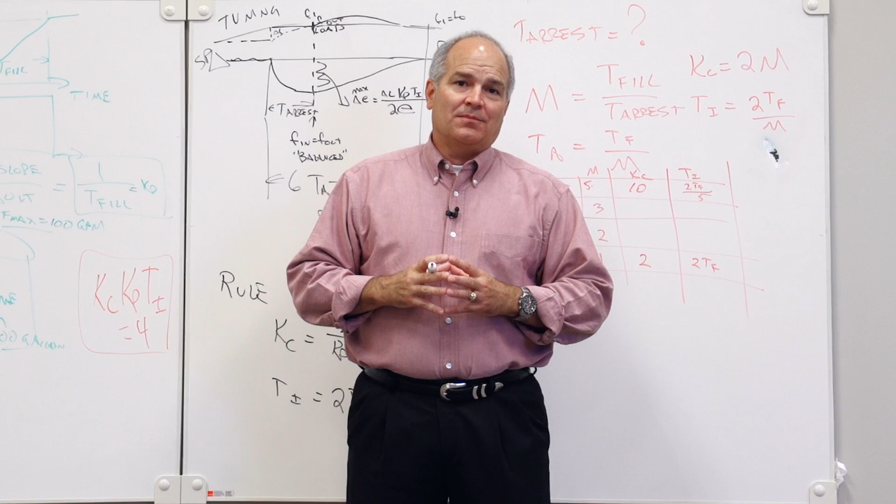So these are some techniques that we have found when we work with industrial loops. Remember, 95% of all industrial loops oscillate. About 10% of all your control loops are tanks. Tanks oscillating cause an imbalance in your plant, whether it's due to mixing, whether it's due to header pressures, consistency, blending. There's a lot of issues with tanks that can cause problems when they're oscillating.

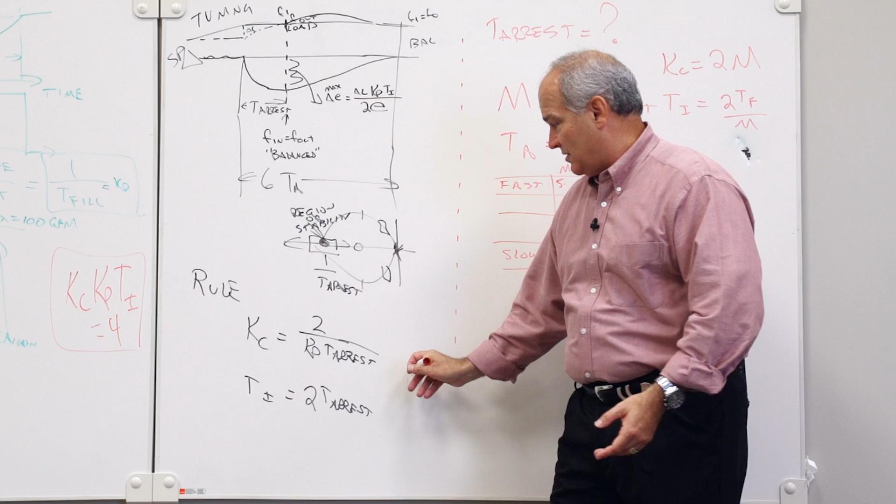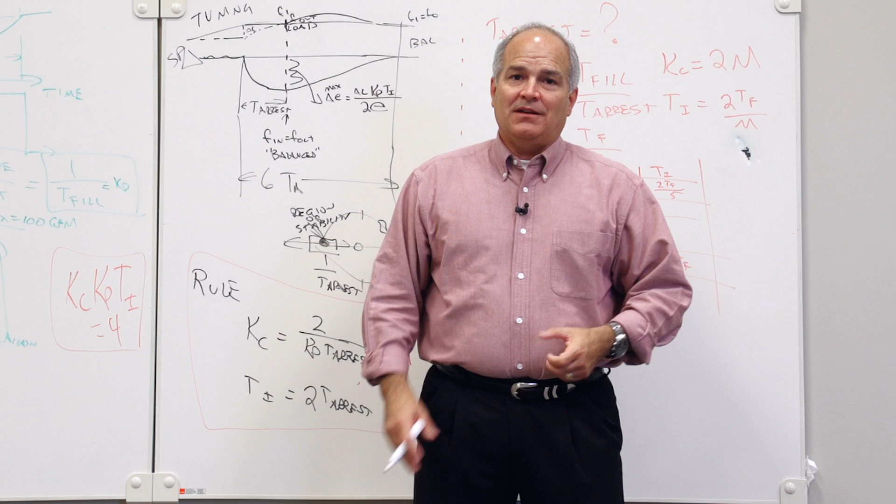These techniques first identify the process, whether you do a bump test to calculate the slope, you look at the volume to calculate the fill time, you use these tuning techniques that I'm showing you here. This tuning rule is the rule for tank levels. Make sure that the integral time is a function of your seconds. If it's in seconds or minutes, make sure that your slope and your integral time are lined up. Then these other things are just ways you can come up with an arrest time that is satisfactory for you and your client. That's our lesson. Happy tuning.